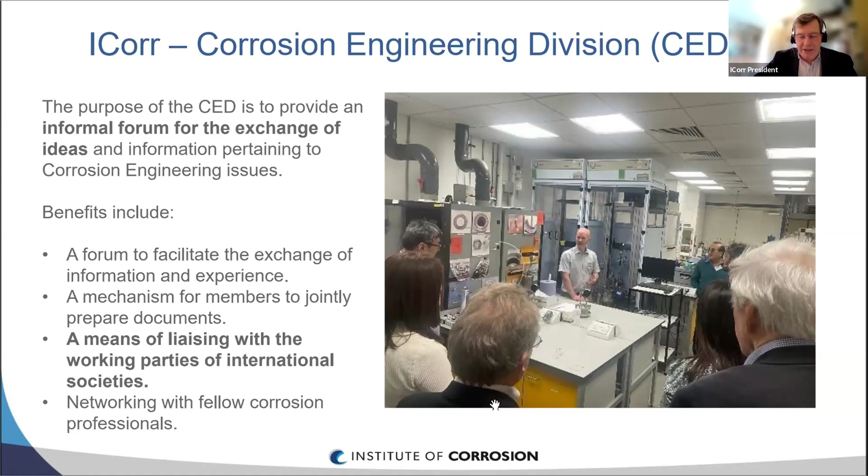And we have our third major division, which is our Young ICorr division for corrosion members under 35 years of age, where we help them develop within the industry, provide a network of contacts for them to integrate better with organizations.

And progress their careers to chartered status. And we've recently started supporting University of Manchester with scholarships, so we provide funding for 6 students every year to help them with their studies at Manchester University in corrosion.

And we have both registrations for chartered scientist and chartered engineer, which can be applied for through ICorr. Once you have ICorr membership, we can assist you to get either a chartered scientist or chartered engineer additional professional qualification. That's all for me just now, and thank you very much, and look forward to our speaker joining us shortly.

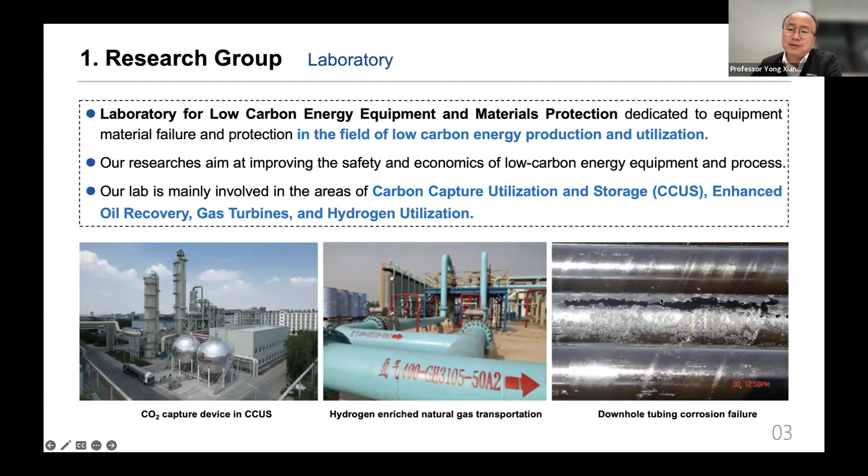We have 3 professors in our group, 3 associate professors, and 1 lecturer. We have different backgrounds. My background is actually thermal engineering, but I got into corrosion when I got my PhD degree at Tsinghua University. Dr. Yan Wei works on wellbore integrity, and Professor Wang Jiangyun works on multi-phase and erosion corrosion. So we have different backgrounds, and we cooperate together so we can do better work, I think.

I think the organizer has already introduced my resume. I graduated from Tsinghua University and got my PhD degree in 2012. I did my postdoc at Ohio University. At Tsinghua, I did research related to supercritical CO2 corrosion, meaning when CO2 is transported in the supercritical state, there will be some corrosion problems inside, so internal corrosion of CO2 pipelines, especially when it contains sulfur dioxide and oxygen impurities. Then at Ohio University, I did work related to MEA corrosion, MDEA corrosion, that is CO2 capture, especially for chemical absorption technology for CO2 capture. When I came back to China University of Petroleum, Beijing, 10 years ago, I did research related to downhole tubing corrosion, and now I'm working on storage systems, which also have corrosion problems.

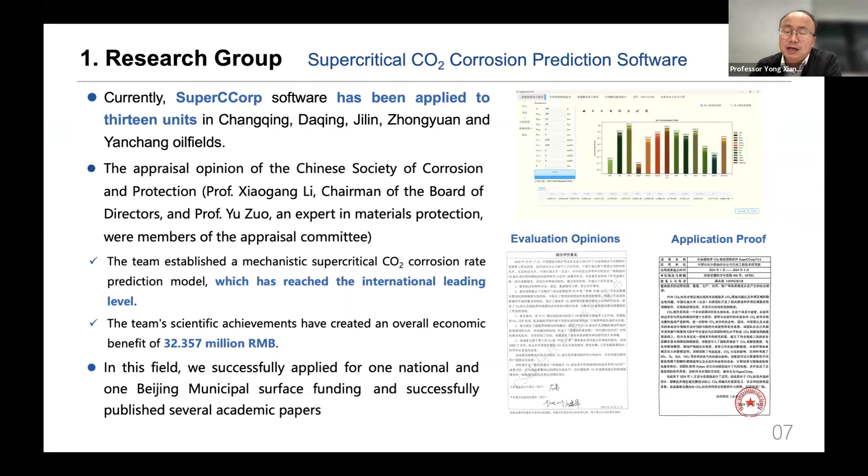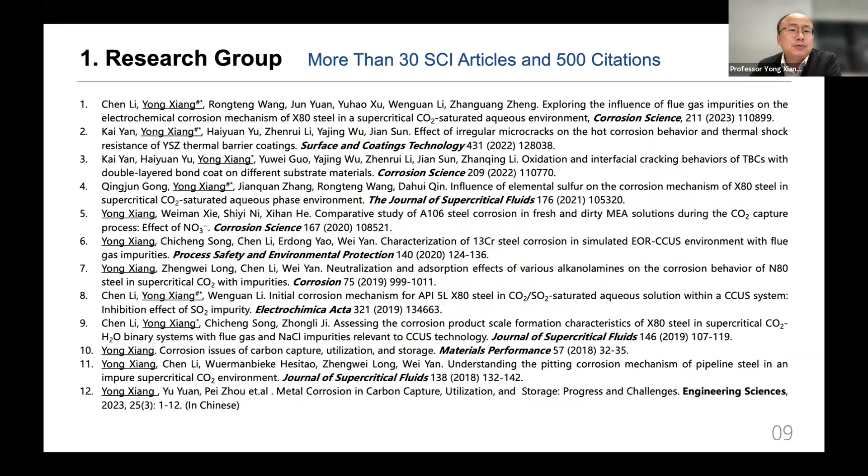That's my research. We also have a lot of good experimental equipment. We also developed SuperCCorp software, which is used by Changqing, Daqing, Jilin, Zhongyuan, and Yanchang oil fields all over China. We have received a lot of awards and published a lot of papers, including the Shanxi Provincial Scientific and Technology Progress Award and the CSCP First Prize Award. We have more than 30 papers related to CCUS corrosion. You can check my personal website to see these papers.

So the second part, I would like to give you the research background, what I have done over the 17 years.

What I do is corrosion in the CCUS environment. What is CCUS? Because of climate change problems, we have to reduce CO2 emissions to the air. So we have to capture the CO2, then transport it to utilization and storage sites. We use it to enhance oil recovery or for other utilization purposes, and then we store it onshore or offshore.

We also have a dual carbon goal for China, that is the carbon peaking and carbon neutrality goals. So CCUS is very important for these two goals to be realized.

But we also still have two big challenges for CCUS nowadays. One is the high energy consumption for capture. As we all know, we have to use energy to capture the CO2, but it uses a lot of energy. So how can we reduce the CO2 capture energy consumption is a very big question to answer.

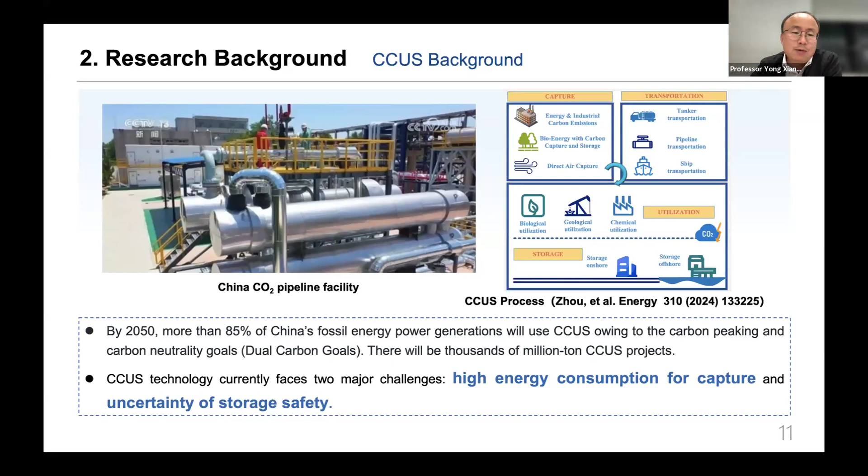But today we would like to talk about another challenge, that is the uncertainty of storage safety. Because as we know, after the CO2 is injected underground, corrosion is still happening in the downhole area, not only on the cap rock, but also in the downhole area. If the corrosion slowly happens over maybe 100 years, 1,000 years, 10,000 years, maybe the CO2 will come out. Will it come out together in a very large amount? I'm not very sure. So my work is to try to answer these questions.

Here are some CCUS corrosion characteristics that I summarized, including the wide range of equipment and materials. This is very important because it may involve power plant capture facilities, transportation pipelines, and injection and storage tubing. So there are a lot of materials involved.

And the media inside this system is also very corrosive. As we all know, CO2 is very corrosive. If it has impurities including H2S, NOx, SOx, oxygen, it will be very corrosive. And in this system, it will be a multi-phase environment. We have four phases for CO2 - it can be gas, liquid, solid, but it can also be the supercritical CO2 phase. So in different phases, it may have different corrosion mechanisms.

Another thing I've mentioned is the impurity - when impurities come into the system, the mechanisms can be different. Also, the corrosion product film composition is complex and variable with time. Maybe for 1 year of corrosion it is this, but after 10 years, 100 years, maybe the corrosion products will change. I have my PhD students doing this research. And also we lack some corrosion protection experience, so I think we have to do a lot of work in these areas.

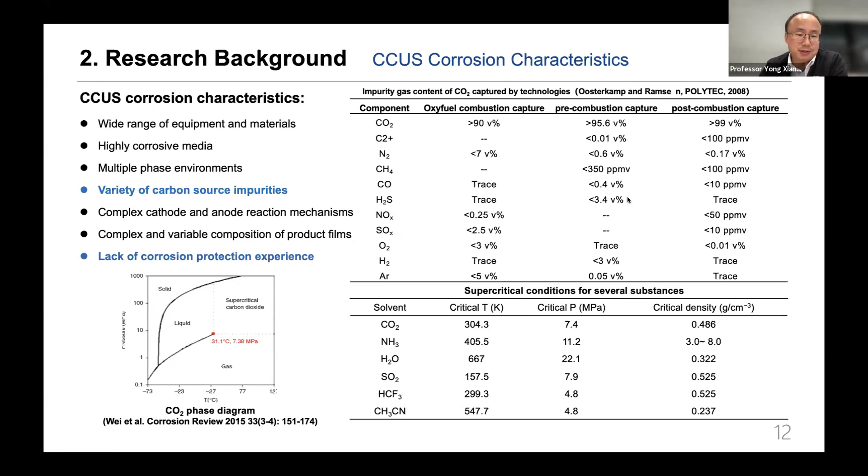So for the impurities, if you use different capture technologies, you will get different impurity concentrations, like oxy-fuel combustion capture - you will get a lot of oxygen inside. If you use pre-combustion capture technology, you will get a lot of H2S inside. So with different technologies, you get different impurities, then different corrosion mechanisms, different corrosion laws. That's the different things we encounter.

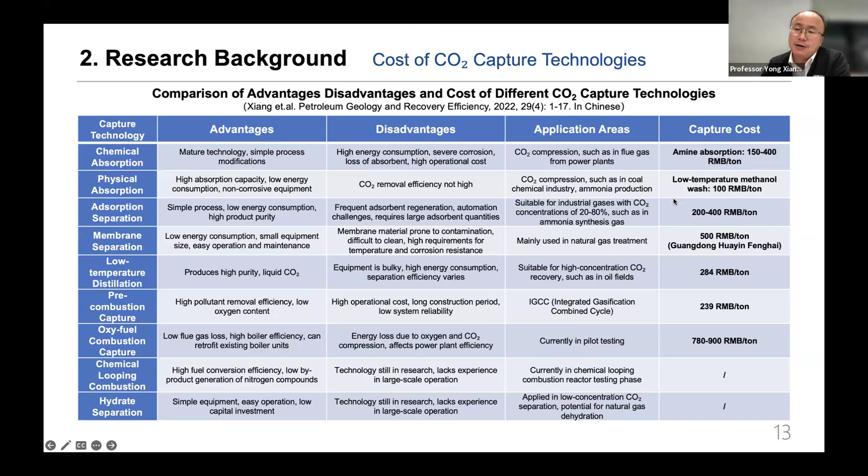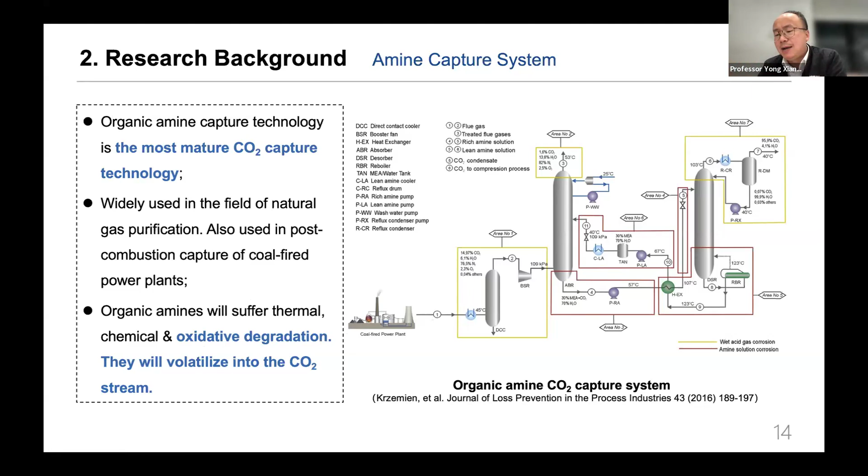So for chemical absorption, this is the organic amine CO2 capture system. Here we have an absorber and regenerator. The regenerator operates at high temperature, maybe more than 120 centigrade. So when used for coal-fired power plant CO2 capture, it may have oxidative degradation because there's a lot of oxygen in the flue gas. When the flue gas goes into the absorber, the oxygen will react directly with the organic amines, so the organic amine will degrade.

So here we have a comparison showing the cost of this kind of capture technology. You can see we have to use electricity for pretreatment, absorption, compression and liquefaction. This will cost more than 100 RMB. And circulating cooling water - every step you have to use it - also has a cost, maybe 50 RMB. Most importantly, you have to use steam, very high pressure, high temperature steam, to regenerate the CO2 from the rich amine.

When you heat it, the rich amine, the CO2 inside it will come out. Then the CO2 is separated from the other gases, so CO2 is captured. Another thing is the definition of the carbon source concentration. Actually, the coal-fired power plant is a low concentration carbon source. It is below 20%, maybe 10 to 12% by volume concentration.

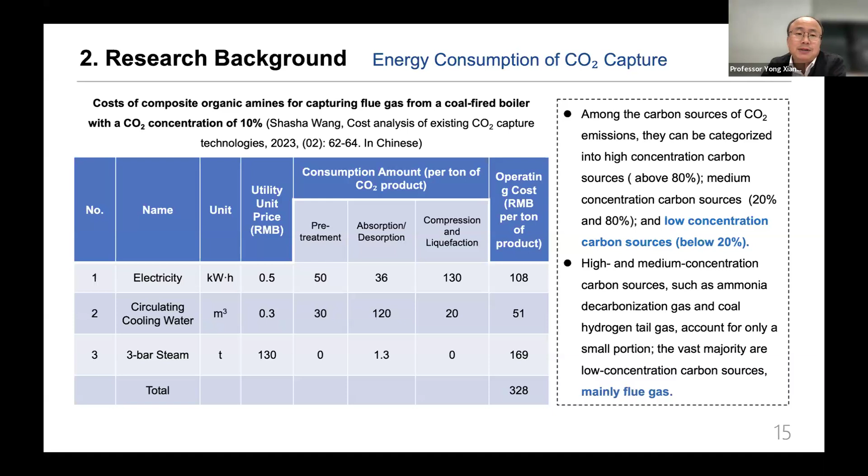In these systems, we have a lot of corrosion problems; here we have a reference to see these problems. They have uniform corrosion, they have pitting, but they also have another very big issue, that is stress corrosion cracking, also called ASCC. Here we have a picture taken from a CO2 capture power plant. You can see some cracking. That might be ASCC, but we are not sure. We are doing research work to find out why this crack happens.

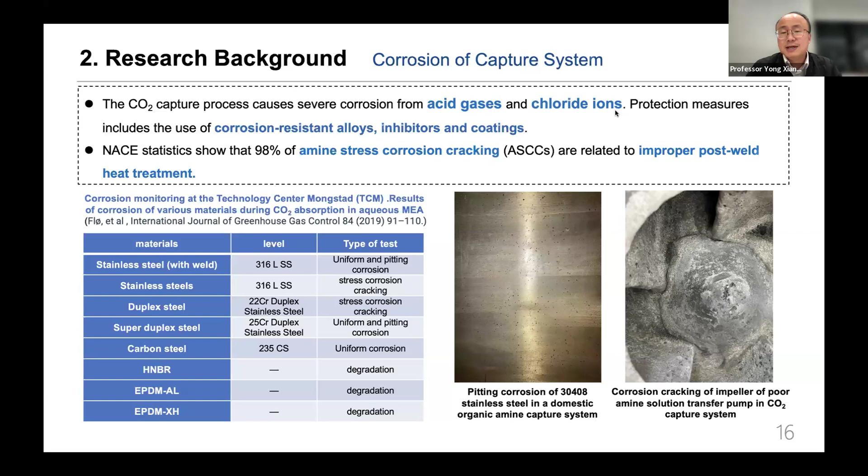You can also see in the middle pictures some pitting on the stainless steel 304. It's austenitic stainless steel. The pitting can be observed on the surface. Why does this happen? We searched for the reasons. Maybe the chloride ions in the systems accumulated with time. So when the chloride ion concentration is very high, pitting may happen. So stainless steel in a fresh new CO2 capture plant may have no pitting problems, but several years later they will have pitting problems because of chloride ion accumulation.

The next part is the transportation systems. In the USA, they have a lot of CO2 pipelines, I think more than 6,000 or 7,000 kilometers. There is a statistic over more than 20 years: they had only 29 reported accidents. Actually, the number is not very much, but you can see for the CO2 pipeline, corrosion as a causative factor is about 45%. So corrosion is a big challenge for CO2 pipelines. We have to address these problems.

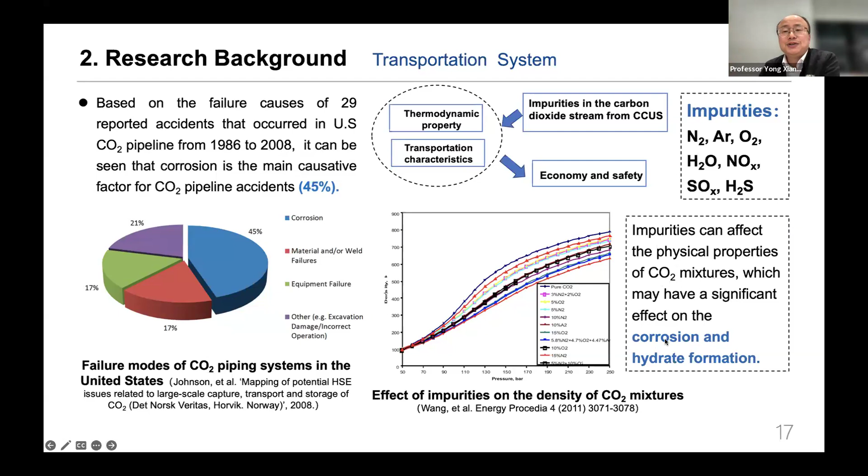As we all know, there are a lot of impurities inside the CO2. If they come into the CO2 pipeline, they may have an impact on the physical properties of the CO2 mixtures, and in the end, they will affect corrosion and hydrate formation. Corrosion also has a lot of influence factors, including the medium, the materials, environment, and others. The medium depends on what the CO2 has inside, that is the impurity gases: the kinds and concentrations of the impurity gases, especially the water content.

Maybe 12 years ago, we also found the same law as this picture shows you. When the water content increases above the critical relative humidity, the corrosion rate will increase sharply with the water content. So you have to control the water content in the CO2 pipelines, as well as other impurities. Oxygen enhances the corrosion. SO2 and NOx will enhance the corrosion. We'll talk about it later.

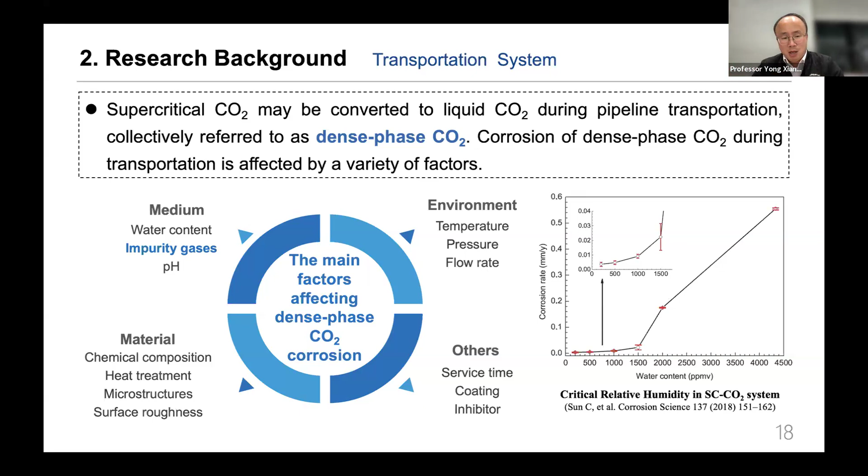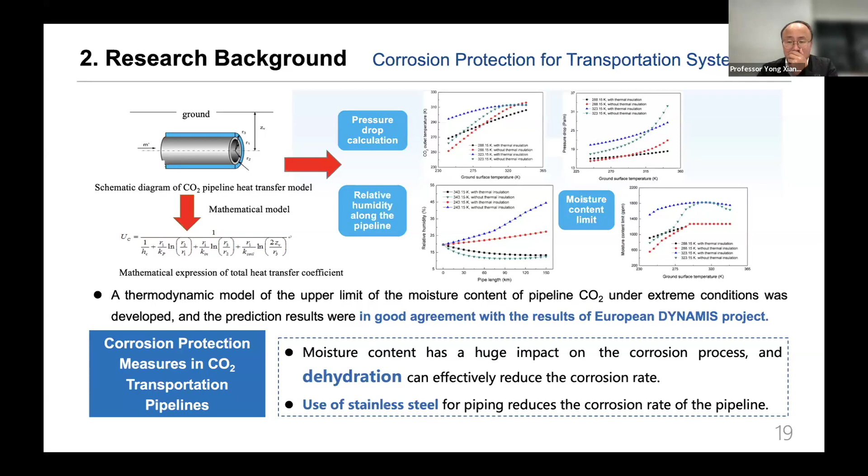So what is the conclusion for corrosion protection of the CO2 transportation pipeline? Our suggestion is dehydration: you have to remove most of the water inside, then you can control the corrosion very effectively. Maybe below 500 ppmv, maybe 200 ppmv. In the USA they also have a standard for that, maybe 40 ppmv. But if you have a lot of money, you can use stainless steel, like in Norway. They use stainless steel for the CO2 pipeline. It can also control the corrosion.

But when we use the CO2 to enhance oil recovery, there may be corrosion problems for the injection wells. There are also corrosion problems for the production wells. And at the end, the CO2 will go down to the basin, underground. There is a very big challenge that may happen: will the CO2 come out?

When will the CO2 come out? If it comes out, what is the danger? The danger for people, for human beings — I think it is dangerous, because more than 38 years ago, at Lake Nyos in Cameroon, natural CO2 came out from the lake and spread out. Around 1,700 people died at that moment.

So here's another news item. That is the world's first CO2 leakage of a CCS or CCUS project, which happened in the USA, in Illinois. About 8,000 tons of liquid CO2 and other fluids flowed out to the uncontrolled area. Actually, the news didn't say that the CO2 came out to the atmosphere, but maybe it went to other uncontrolled areas. They also had two leakages, which happened in March and July this year. Why did this happen? Because the monitoring well was corroded, so the CO2 came out to the uncontrolled areas.

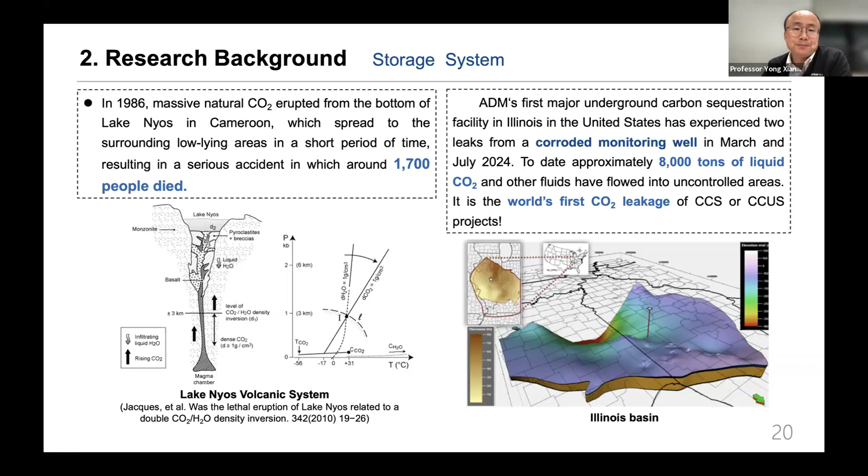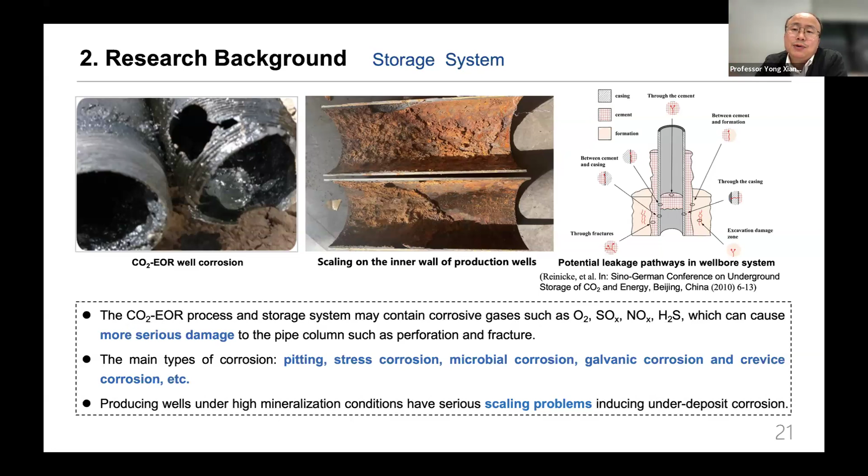So do we have any method to control these problems? Actually, for the injection and for the production, we have corrosion control measures. But for the storage, I think we have very few technologies that can be used to control the corrosion in the area of the tubing.

So another question is how many years we have to store the CO2 underground? 1,000 years, 10,000 years, or more than that? Actually, we are not sure. So after long corrosion, maybe 1,000 years, maybe the CO2 will come out from the first phase, second phase, maybe from the tubing, the metals, because of corrosion, and the cement may also have corrosion problems. We also did some work related to cement corrosion in these areas. So that's a very big question. I'm still working on it.

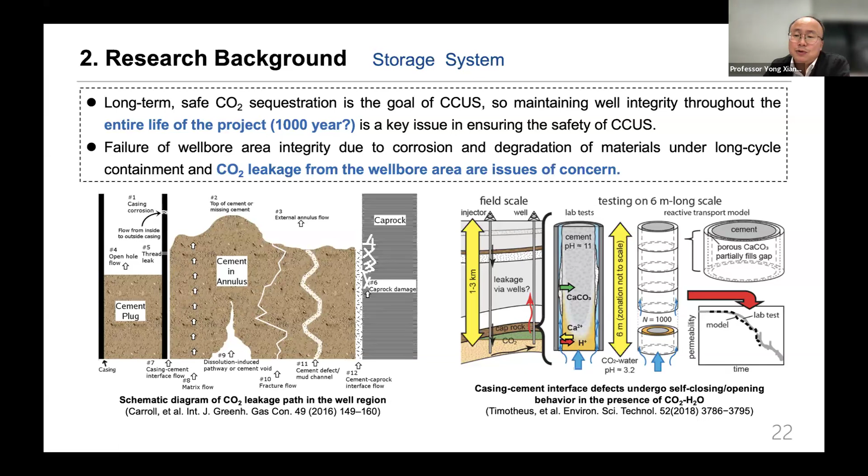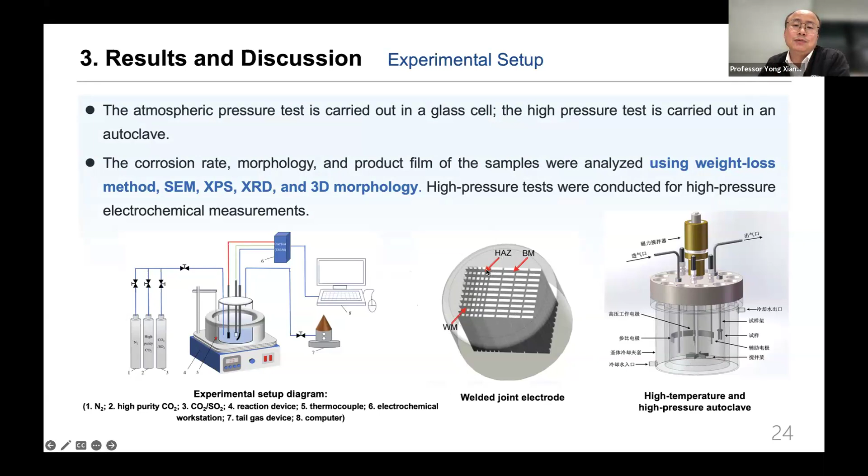So for the third part, I would like to give you some of the results and briefly discuss the spontaneous corrosion inhibition phenomena. In our work we used a glass cell, and also a high temperature and high pressure autoclave to create the corrosion environment. And we also researched the welded joint electrode. So here we have the weld metal in this area, the heat affected zone is this area, and the base metal is this area. So we have some results to show you. This work I did 10 years ago at Ohio University.

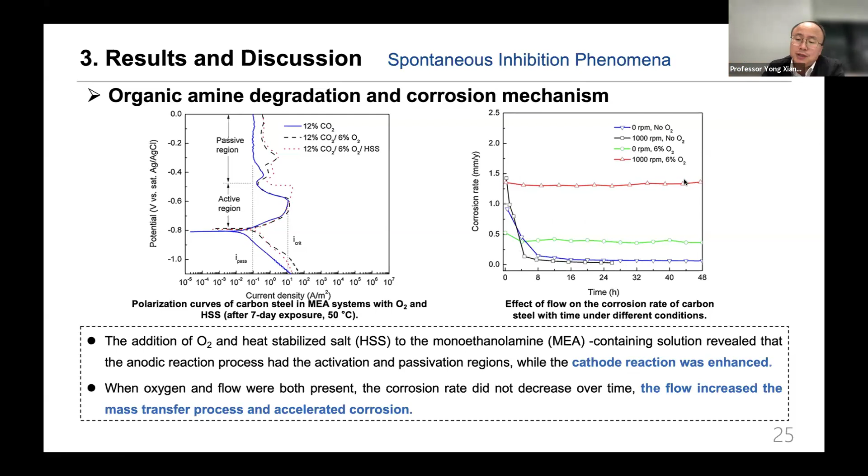And maybe 5 years ago, we did another work. We found a very interesting phenomenon. That is, when you use a fresh new MEA solution and put the coupon inside it, you will find a high corrosion level like this. But if you first use oxygen and CO2 to give an oxidative degradation to the MEA solution, with the degradation for 120 hours, and then put the coupon inside for 120 hours,

you will find that for the same time, the corrosion rate for the dirty solution, that is the degraded MEA solution, is very small. You can see this, smaller than 0.01, but here we have a very high corrosion rate. We also did SEM pictures. You can see this one. This is the dirty solution for 120 hours immersion. So we can see that there is a much higher corrosion rate for the fresh solution than for the dirty solutions.

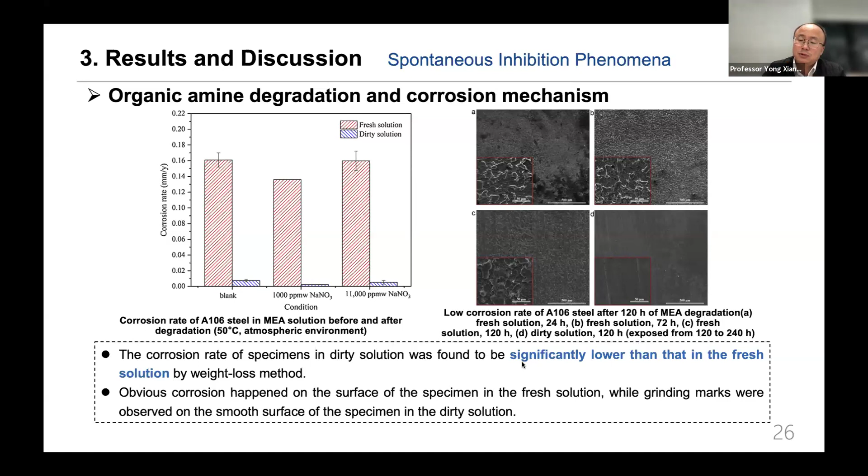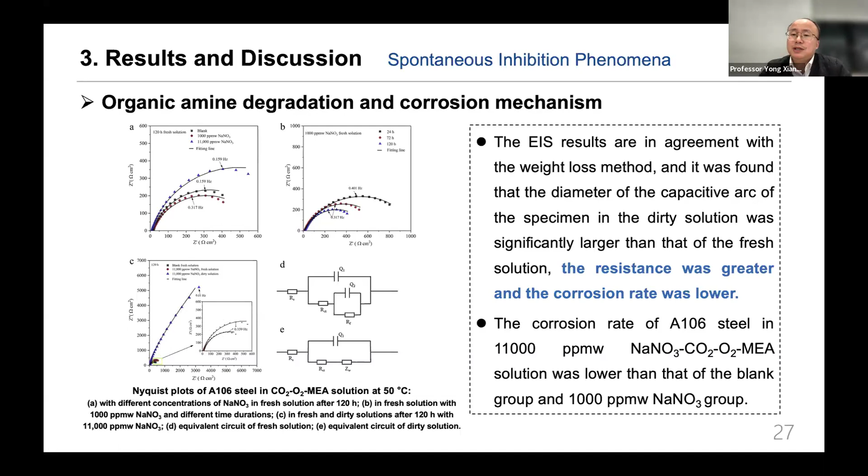So we would like to find the reasons. We also did some EIS tests, and we found the same thing. This result is also consistent with the weight loss corrosion result. You can see this line is the EIS spectrum for the dirty solution, and the others are not dirty solutions. You can see there is a very big impedance. So we can see in this system, for the dirty solution, the corrosion rate was much lower.

And we also did some film characterization, and we found some products like ferric oxyhydroxide, and also with ToF-SIMS, we found some degradation products on the surfaces. That is hydroxyethyl imidazole, that is HEI. That is a kind of MEA degradation product. So we think maybe HEI adsorbs on the surface of the coupon, and then it reduces the corrosion rate of the A106 steel.

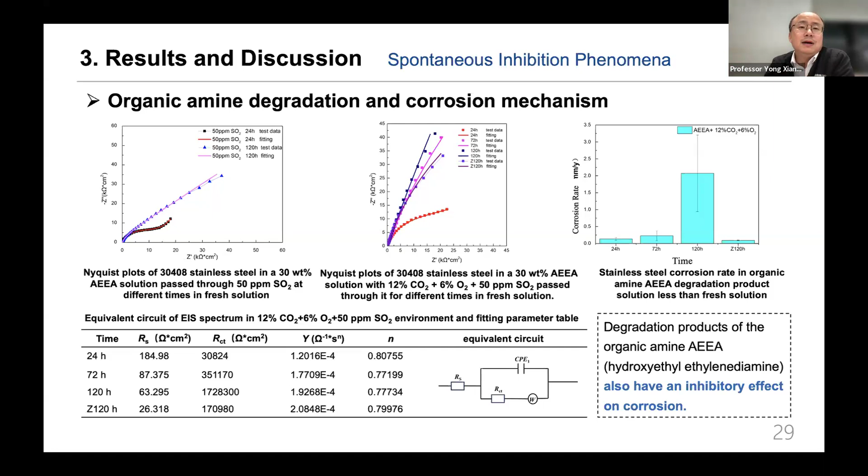Maybe half a year ago, some people in USTB, in Dr. Bowie Zhang's university, came to ask me: "Professor Xiang, I found the same things that happen in your articles. Is that correct?" I answered him that it's correct, because I repeated it for AEEA and for MEA, and in his work we also find the same phenomena. So that is the capture system.

For the CO2 transport and injection systems, we also would like to check SO2's effect on the corrosion. Maybe 10 years ago, we thought that when SO2 is injected into the CO2 system as an impurity, it will enhance the corrosion rate. But in our tests, especially for the atmospheric CO2 system, it may reduce the corrosion rate, because we found some corrosion product formed on the steel surface when SO2 was injected, especially at the initial stage of the corrosion.

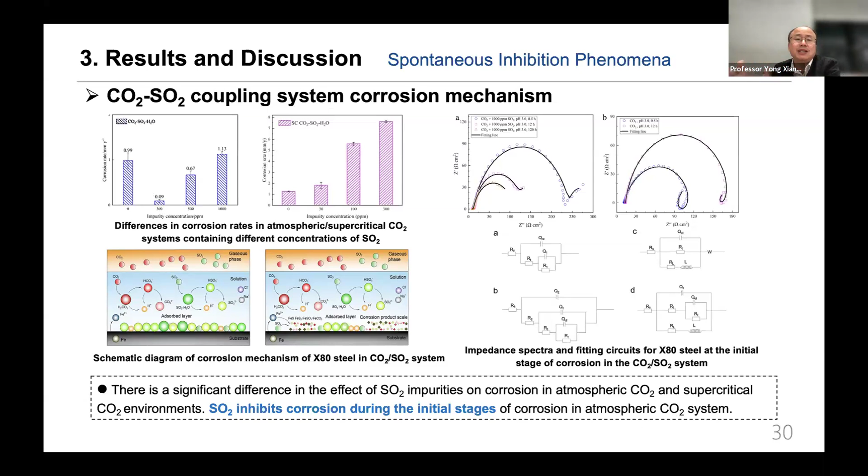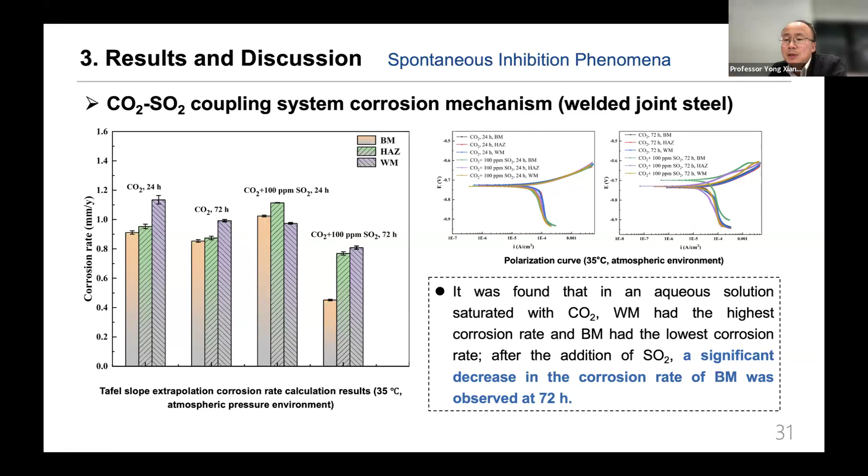We also did the same work for welded joint steels and found the same things. When SO2 goes into the system, the base metal also reduced its corrosion rate after about 72 hours of exposure. We have repeated this experiment and found the same law: the base metal has a much lower corrosion rate than other parts like the HAZ and WM. We also did the EIS test and found the same things.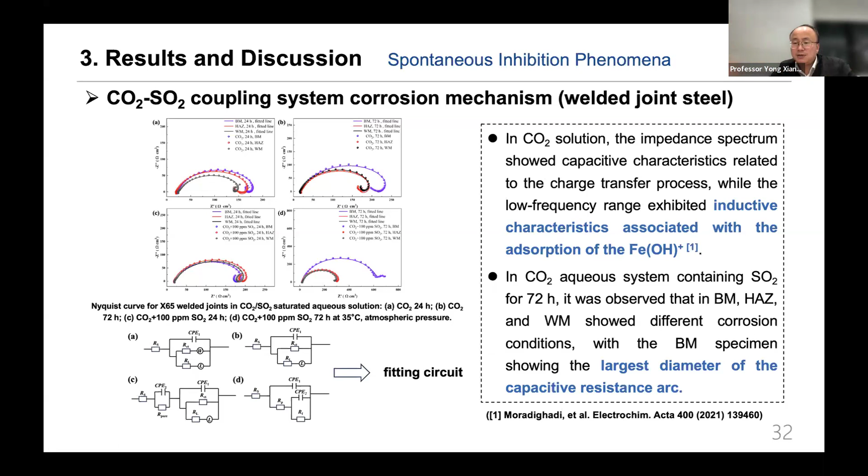You can see some adsorption on the surface. For the base metal at 72 hours with SO2, there is a very big capacitive arc diameter, not inductive. That shows the corrosion rate for the base metal is very low. We also did some XPS tests and found that FeS, ferrous sulfide, formed on the surface. Maybe this reduced the corrosion rate of the base metal.

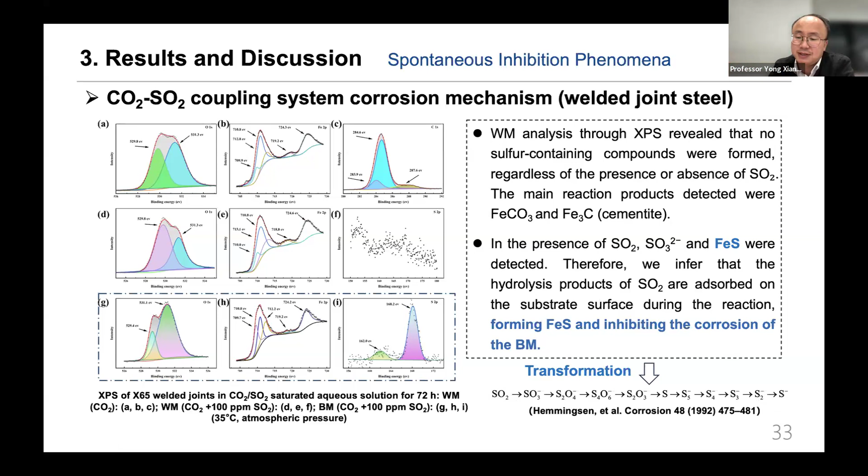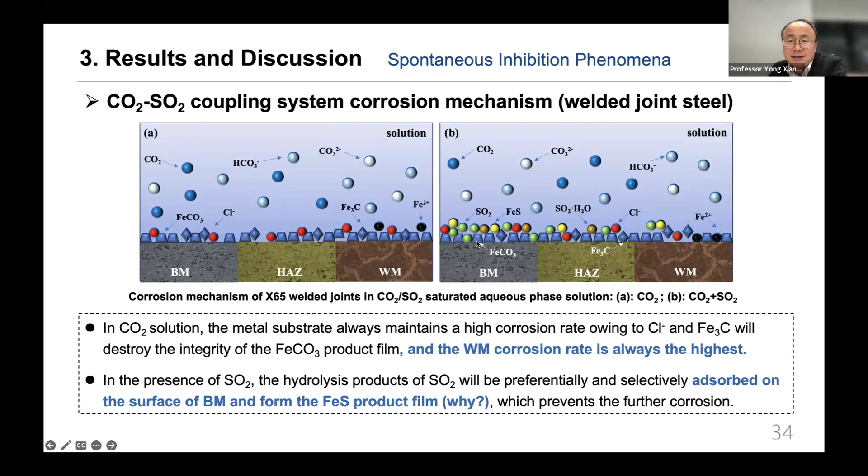Here is the transformation mechanism, which was found many years ago. When SO2 is in oxygen-free systems, it transforms from this state to this state, maybe to this state, and when it forms FeS, the corrosion rate goes down. We also have another picture to show the mechanism. But one thing we don't know is why FeS adsorbs on the surface of the base metal and forms the FeS product film in this area. Why not in this area? Maybe we have to find the answers.

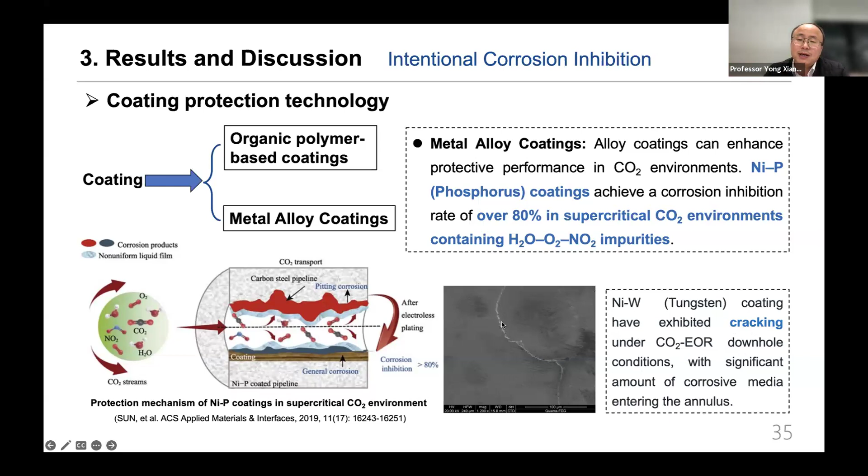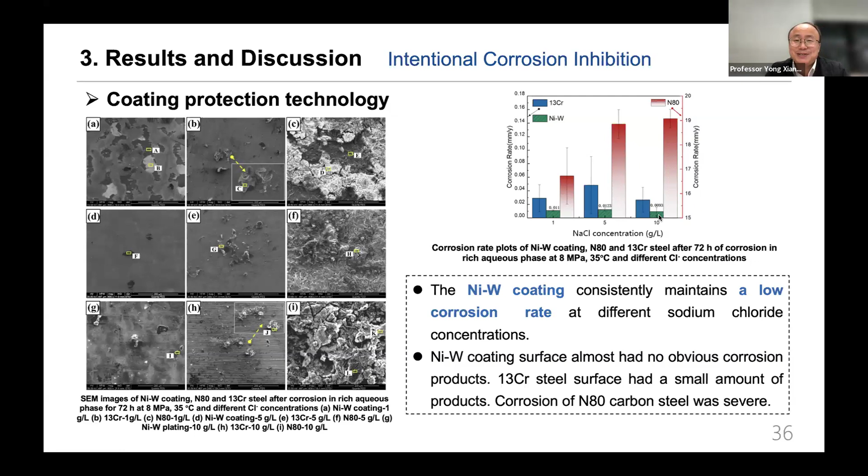Besides the spontaneous corrosion inhibition phenomena, we also have intentional corrosion inhibition measures. I will briefly talk about coatings. Metal alloy coatings are used, but they also crack under CO2 downhole conditions; after maybe 20 days of corrosion testing, it cracks like this. We have to work on improving this. The nickel-tungsten coating actually has a very low corrosion rate, except for the cracking disadvantage. Organic polymer-based coatings may have blistering problems in the supercritical CO2 environment, so maybe they are not very proper for this environment.

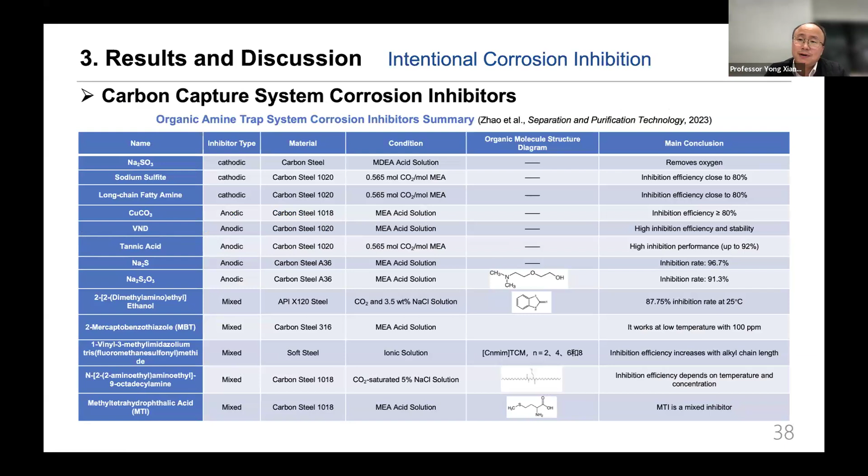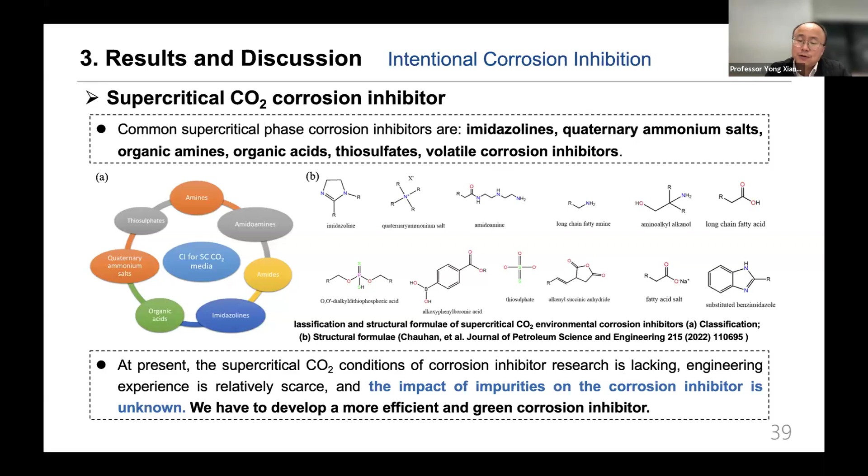Here we have some corrosion inhibitors for CO2 capture systems, listed from a very good article you can read and cite. Some inhibitors like imidazoline and quaternary ammonium salt can be used in the CO2 system, but the problem is: when impurities come, what is their impact on the corrosion inhibitor? That is unknown, and I think we have to work on it.

Let's go to the Q&A session for now. We've got a question from Steve Tate. His question is: is Professor Yong Xiang working towards a lower cost standardized solution for coal-fired emission?